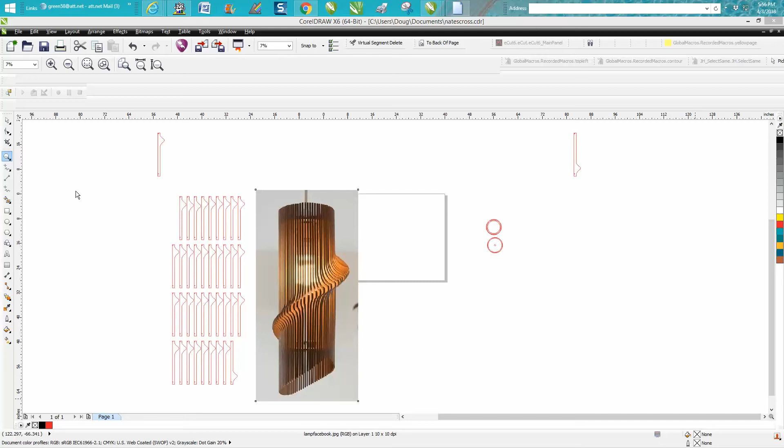Hi, it's me again with CorelDRAW Tips and Tricks, and this is the fourth or fifth video on making this lamp. If you haven't watched the previous ones, I painstakingly moved from this to this so they would go downhill.

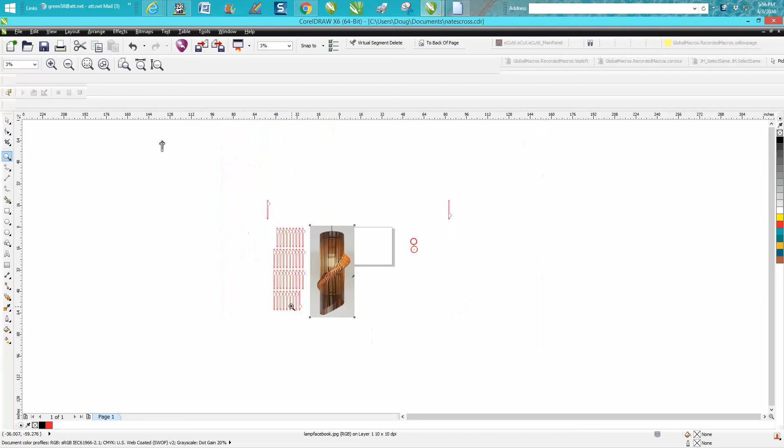So I started at the top, and I showed a couple of ways to do it. One of my viewers, actually from a Spanish-speaking country, I don't know where, asked me why I didn't use the blend tool.

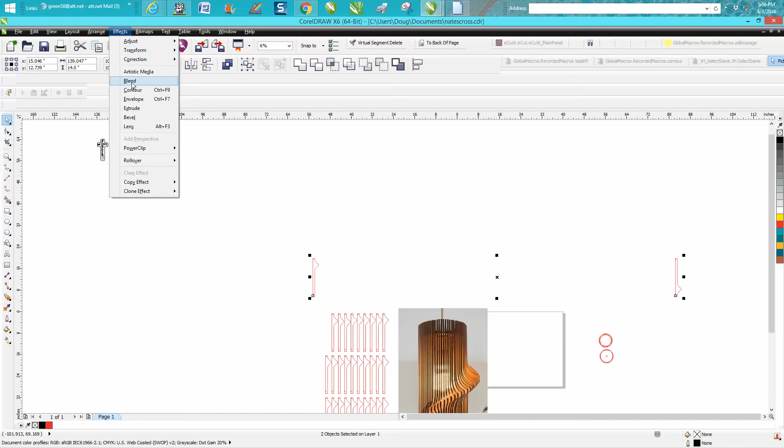So I've got two of these, the bottom one and the top one. I think it'd be helpful if you had them in the same alignment, so select both and hit B to put them at the bottom so they're equal. While they're both selected, go up to Effects, Blend, and tell it you want 40 of them, and hit Apply. It did it automatically instead of having to move those down.

I haven't checked it yet, but I believe it's right, so we're going to check it right now. I'm going to take a 2-point line from that node to that node, and they are dead on.

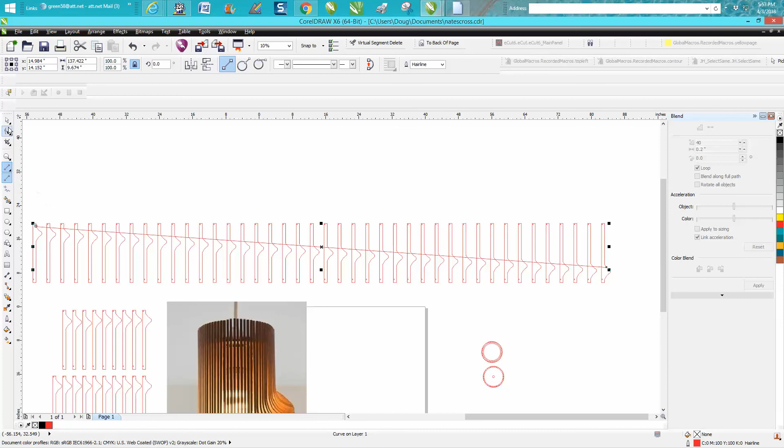So it worked. I was a little bit concerned that it might change other things, but since they're both equal, my little cutouts are equal, the only thing it's changing is this shape, and I missed that node.

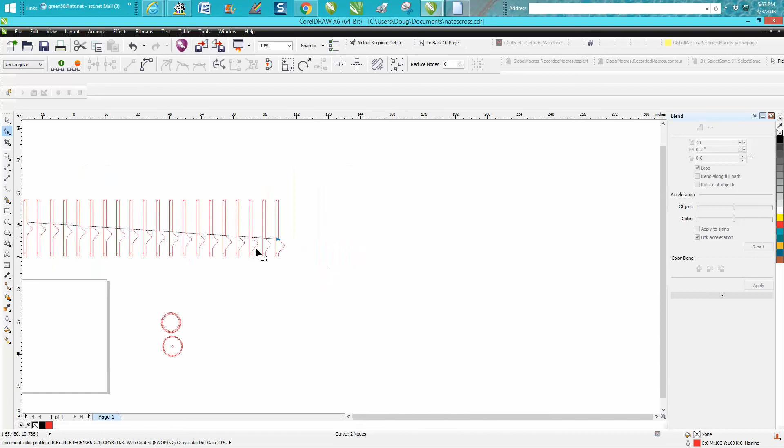So let's take the shape tool and put that node on that node, and now you can see that line is going downhill equally and perfectly. That saved a lot of time, especially since when I make this and redraw it, I think I'm going to do it with 60.

I might have to make my circles a little bit more, so this would save you a lot of time to do 60 of them.